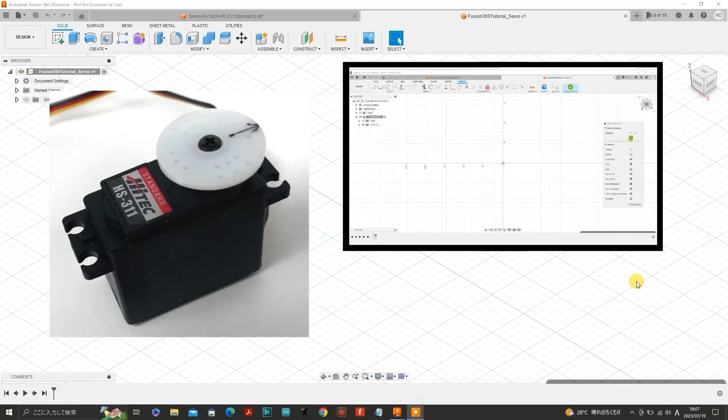In this video I'm going to show you how to draw a servo motor using Fusion 360. The servo I will be drawing is a Hi-Tech HS311 standard servo motor. This tutorial is part 1 of 3 parts, so once you finish part 1 you can click on the link at the end of this video to watch part 2 and then part 3. Alright, let's get started.

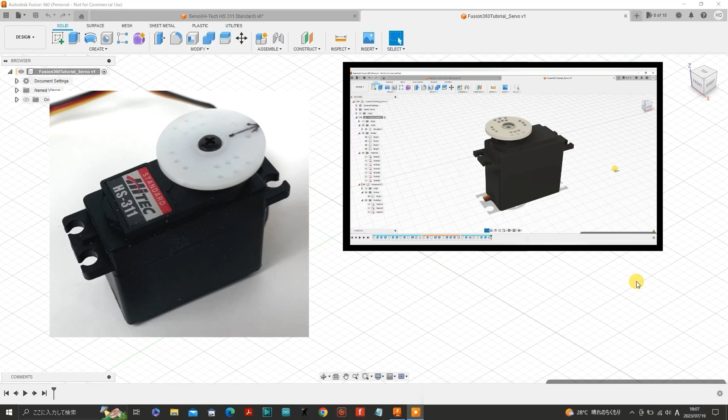Go to Create and click New Component on the pulldown menu. You should name the component if you're creating a large number of components, but I will only create 2, the servo body and the servo horn, so I'll just click OK and continue.

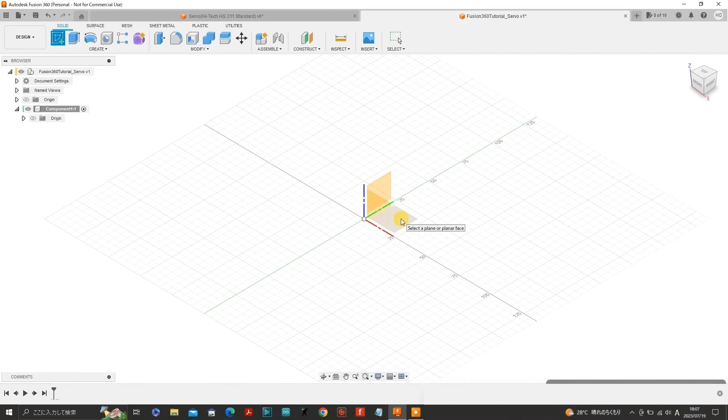Create a new sketch by pressing this icon. Select the XY plane, which is like selecting the floor or bed for a workpiece you are going to create. Now click on Rectangle in Create and select Center Point Rectangle in the sketch palette.

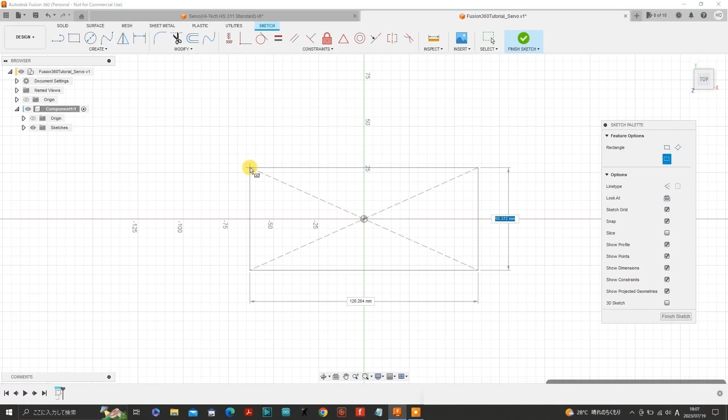Make a rectangle by first clicking the left mouse button on the center point or origin, releasing the left button while moving outwards to an arbitrary position, leaving your finger off the mouse button. Use the keyboard to set the width to 19mm, then press Tab to transfer to the next dimension and enter 52.8mm for the length.

I'll just use the scroll wheel on the mouse to zoom in. Click on Line in Create and create a left horizontal construction line from the center.

Make sure you select the construction icon from the line type in the sketch palette, although this can be changed later if you forget to do so, which I often do.

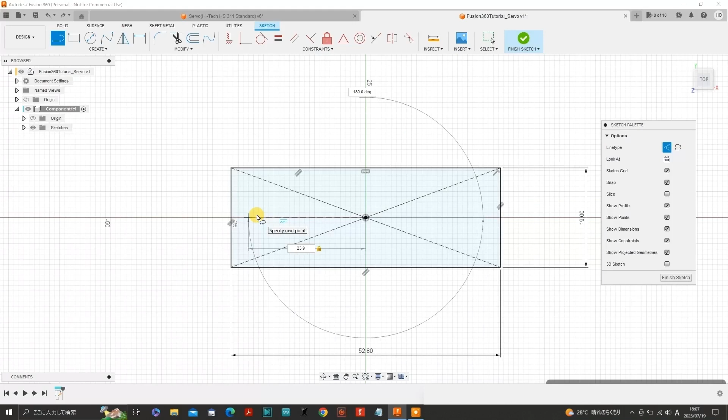From the center, left click once, drag the line in the leftward direction while leaving your finger off the mouse button. Without clicking the mouse, enter the measurement 23.9 from the keyboard and hit return. And there we have our first construction line.

If you are new to Fusion 360, the one thing you will need to understand and practice is being deliberate about dimensions and positions. You'll also need to understand the importance of constraints, which are essential for using Fusion 360 and also incredibly useful. At the moment, the center of the rectangle is constrained or locked onto the origin, position 0,0 on the XY plane. The constraint at the origin is automatic, so this constrained origin becomes an obvious reference point.

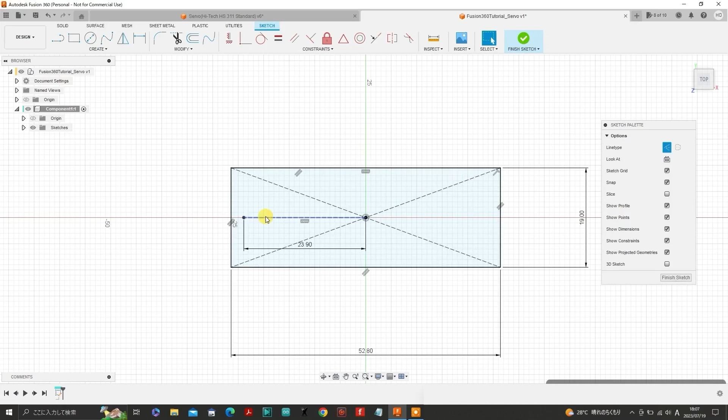Now what I have done is established a constrained construction line that extends leftward 23.9mm from the origin. Inputting 23.9 via the keyboard provided a deliberate dimension by which this construction line has locked onto or constrained. If I had just left clicked at the origin, dragged the line until the dimension read 23.9 and then left clicked at that position, it is unlikely that line would be locked onto that dimension.

Your sketch would not be constrained, in other words. If your sketch is not fully constrained, then you are going to have serious problems at the 3D stage.

Okay, carrying on, select the line icon and start from the left end of the horizontal construction line. Left click the mouse, extend upward with your finger off the mouse button and type 5.1. Now we're going to make our first hole in the left mounting tab of the servo body.

Select Circle from Create, bring the cursor back to the end of the vertical construction line we just added. Left click the mouse, extend away from the center of the circle, but don't click. Use the keyboard to type in 4.3, which sets the diameter to 4.3mm.

I'll just open up the sketches folder on the left here. As you can see, there's a padlock icon attached to Sketch 1, which means the sketch is currently fully constrained. The circle we just added has been drawn as a construction line by mistake.

All we need to do is select the circle and then press the construction line icon to change the circle to a solid line.

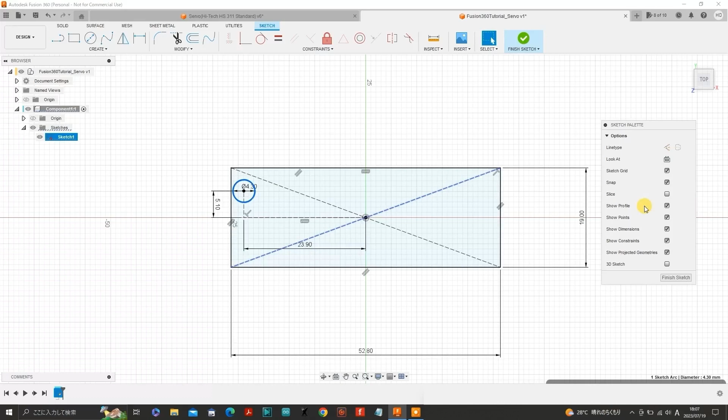Next we want a vertical construction line from the center of the rectangle. Reselect the construction line icon on the sketch palette again and then select Line from Create. Go to the center point, click on the center, drag a line until you reach the top line of the rectangle, and click the top line to snap the construction line in place.

As you can see, this sketch is still fully constrained. If you find that a pencil icon is still showing, that means the sketch is not fully constrained. You'd be best to click undo until the lock icon shows up again, and then find out where the problem is, where you went wrong.

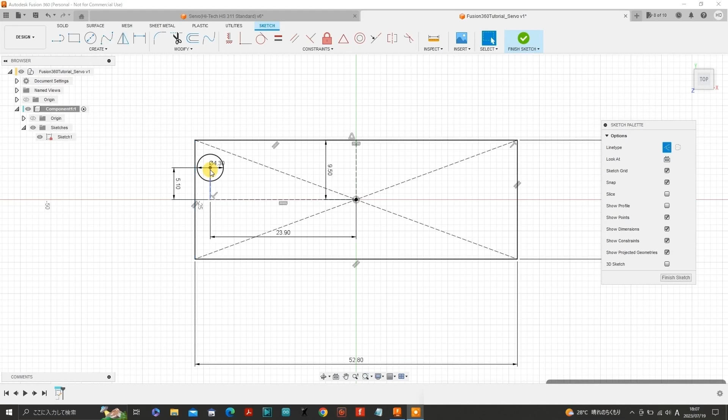Okay, I'll just zoom in a bit more. It's probably a good idea to put in a few more construction lines. Select Line from Create and draw a line here by left clicking the mouse, dragging the line until we reach the left side of the rectangle, at which we can left click the mouse, snapping the construction line into place.

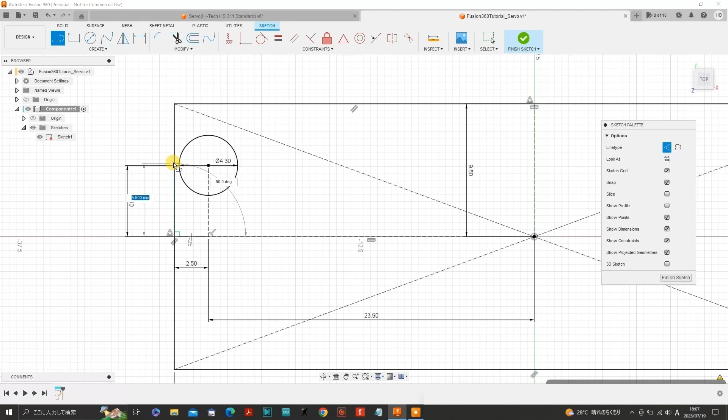From there we can left click the mouse again and extend a vertical construction line. Leave your finger off the mouse and enter 5.1 millimeters on the keyboard and hit return. From the end of this new construction line we can create another vertical line in the same manner, this time 1.3 millimeters in length.

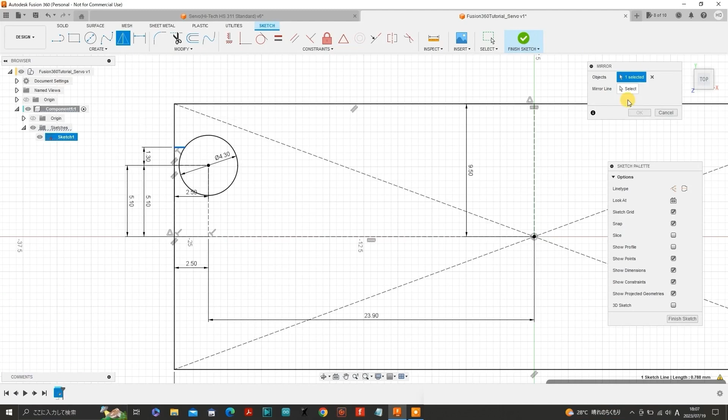Select mirror from create and select this little line that we have drawn. The mirror palette has popped up at the right side of the page here, where it indicates that one object has been selected. Next we need to select the mirror line, so you first need to activate select, that is next to mirror line indicated in the mirror palette, and then select the latest construction line that we have just drawn in.

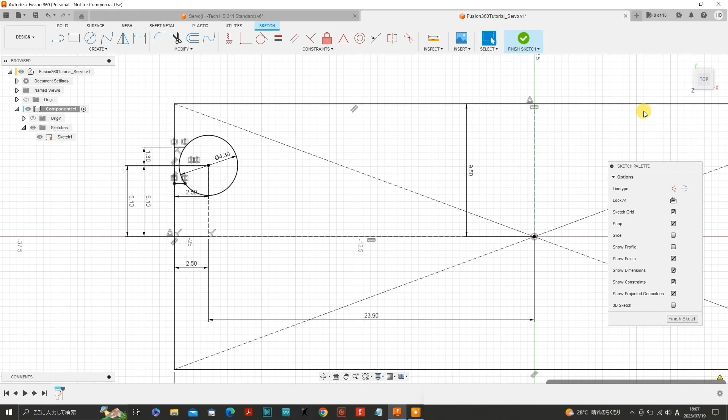Press OK on the mirror palette, and then we have a new little line on the opposite side of the construction line, fully constrained and with the correct dimensions. I'll just adjust and move over to the right side now.

I'm using the mouse wheel to do this. Now select the circle, just zoom in a bit, hold down the shift key and select the two little line segments as well. As a general rule, you need to hold down the shift key if you want to select multiple objects, that is the circle and the two lines here.

Then select mirror and create. Once again the mirror palette pops up, and as we can see, 5 objects have been selected this time. I think that is because there are 2 line segments, and then the circle has been divided up into 3 segments by Fusion 360 due to the presence of the construction lines.

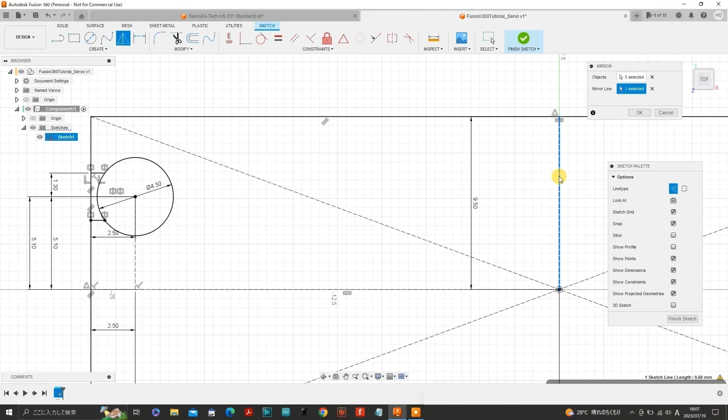I think that's why. Now we activate select next to mirror line in the mirror palette and select the vertical construction line that extends from the center of the rectangle. I'll just zoom out so that we can see the entire rectangle now. Press OK on the mirror palette, and now we have a duplicate hole on the right side.

I think now would be a good time to remove some unwanted lines. Select trim from modify and select the segments that you want to remove, like this.

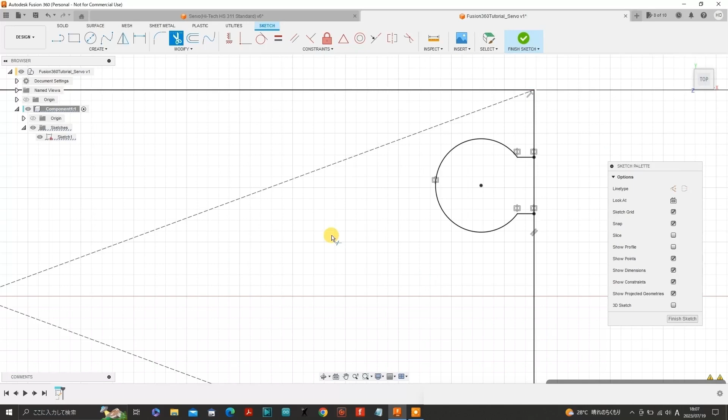As you can see, a warning will show at the bottom right telling us that some constraints and or dimensions have been removed during this operation, which is perfectly normal and nothing to be concerned about. I'll just do the same at the left side, which I probably should have done earlier. Anyway, better late than never.

Select mirror from create and select all the line segments of the 2 holes while holding down the shift key, because we've got multiple objects this time, so you need the shift key. Then after activating mirror line on the mirror palette, select this construction line and then press OK.

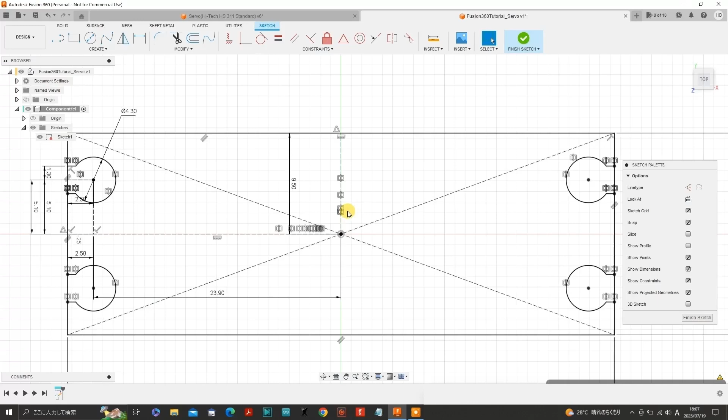Now we have all 4 holes which are located in the right positions in the mount tabs of the servo body. Now it's time to draw the main servo body.

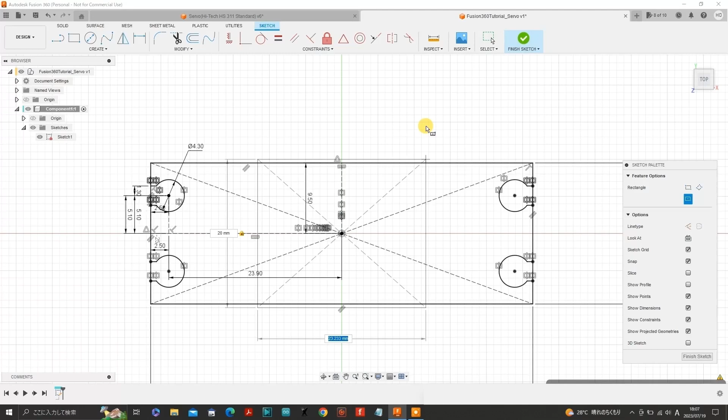Select rectangle from create and make sure you select center point rectangle in the sketch palette. Make a rectangle by first left clicking the mouse on the center point, releasing the mouse button while moving outwards to an arbitrary position. Use the keyboard to set the width to 20 millimeters and then press tab to transfer to the length dimension and enter 39.7 millimeters for the length.

I'll just move the dimensions here so that we can see it better. Okay, now we just need to make sure show profile is checked in the sketch palette, and then we can click on finish sketch. Now we can select the areas we want to extrude while holding down the shift key, which correspond to the mount tabs of the servo, and then select extrude from create.

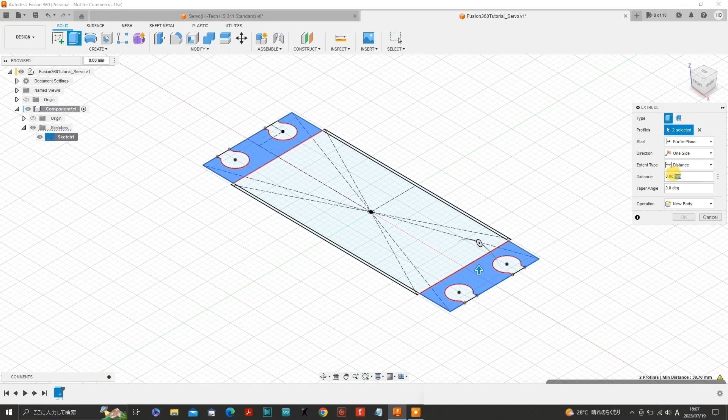As you can see, the extrude palette shows up on the right of the page, and I like to input the extrusion distance in the extrude palette itself. So we'll input 2.4 millimeters and click OK. And there we have two mount tabs.

Well, once you do the extrusion, the sketch disappears, but you can just reselect the sketch file on the left side here and it shows up again.

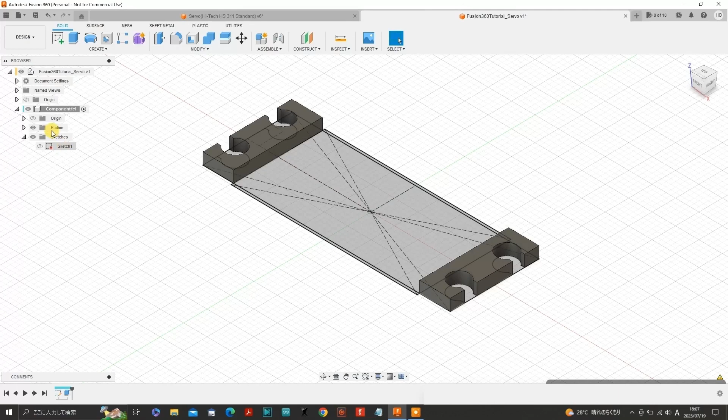We can also extrude the lower body of the servo. Select extrude from create. This caused the sketch to disappear again, so let's reselect the sketch file.

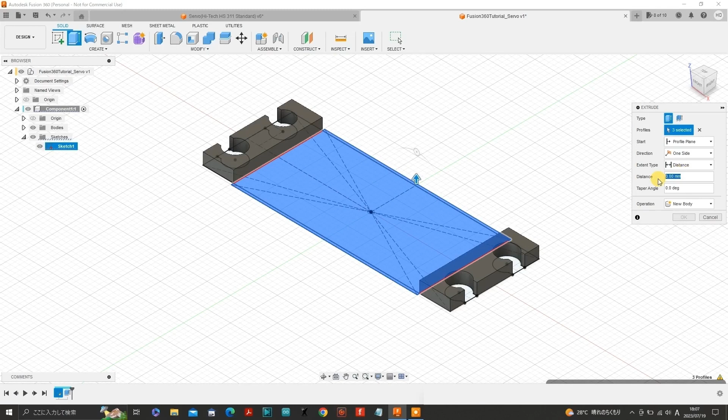Now select each segment of the middle area while holding down the shift key and enter negative 26.5 in the extrude palette on the right and press OK. It's a negative number because we're going downwards from the sketch plane, so the sketch plane is your reference.

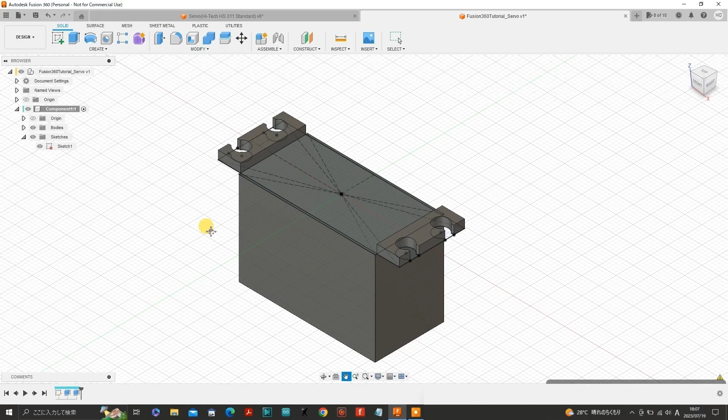Just resize it using the scroll wheel on the mouse, and now it's beginning to take shape. Let's move it to the center of the page. Select extrude from create so that the extrude palette appears.

Select three segments on the middle surface and input the value 33.3 minus 26.5 and press OK.

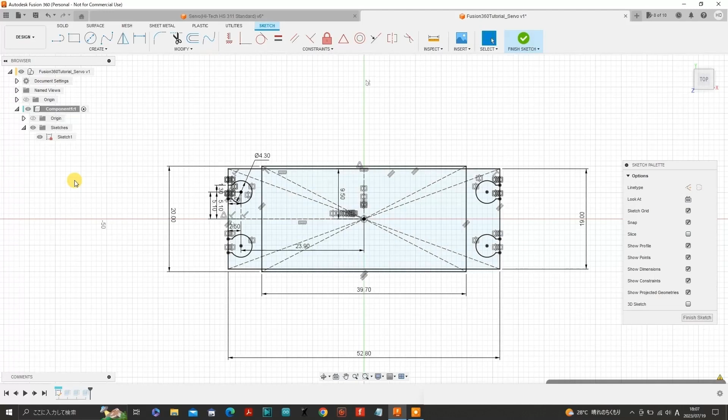Actually, we might want to edit the sketch around the corners of the main body, so we'll go to the sketch file and this time right click on it and select edit sketch. You don't need to, but I often like to switch off show profile on the sketch palette as well.

Adjust the size, select fillet from modify and select the short left side of the 20 millimeter wide rectangle and then the top side, and we get a 5 millimeter radius curve there. So we will edit that to 1.5 millimeters, so a 1.5 millimeter radius.

Now in this video I absent-mindedly hit return for each corner, but it's better to actually enter 1.5 millimeters just once and then select each side of the rectangle until all corners have been rounded and then hit return. That way if you need to adjust the radius of the corners, you only need to adjust one corner and all the other corners will automatically change.

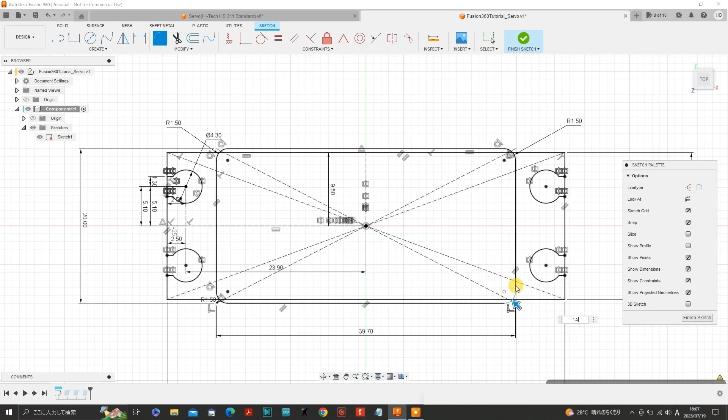Okay, so now we press finish sketch and select the little home icon by the block at the top right of the page, and there we can see a nice rounded surface along each vertical corner of the servo body.

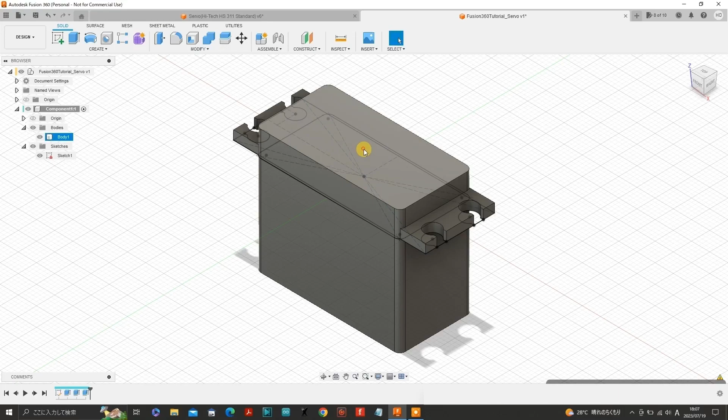Now we need to create a new sketch to lie on the current top surface because we will need to extrude from that surface, from that plane. So we click on the top surface and select new sketch from create, and we're back in sketch mode again.

As you can see on the left, we currently have two sketches, sketch 1 and sketch 3 for this component, and are both fully constrained. I did have sketch 2, but I made a few mistakes on it, so I ended up removing it.

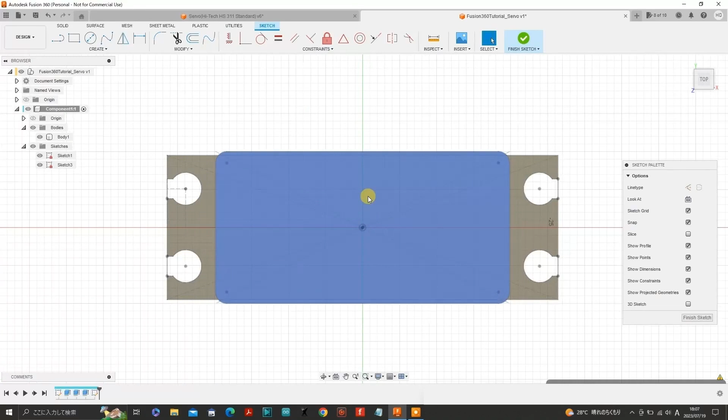It's best to hide the body here by deselecting the eye icon so that we can see our sketch. Next we will select rectangle from create. Choose the center point rectangle on the sketch palette. Go to the origin. Left click the mouse and extend the rectangle outwards, leaving your finger off the mouse of course.

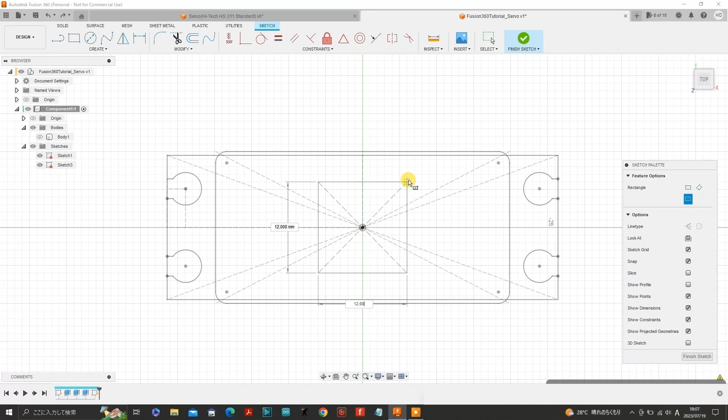Enter 38.7 for the length using the keyboard. Hit tab to transfer to the short side. Enter 19 and then hit return.

Now select Fillet from Modify, select the left top sides of the rectangle and enter 1 to create a 1mm radius, and do the same to the other 3 remaining corners.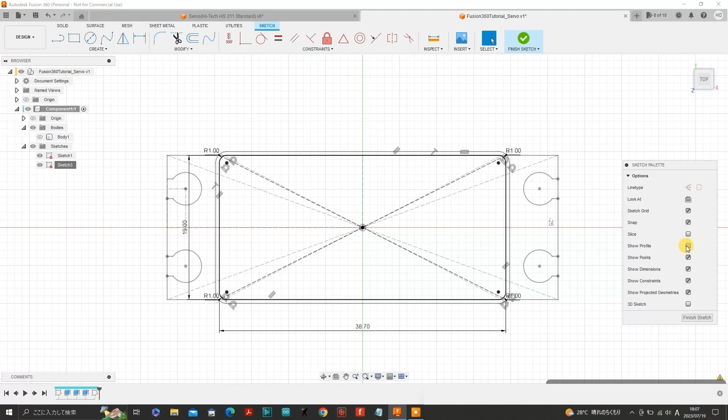Before we finish the sketch, we need to check Show Profile on the sketch palette and then press Finish Sketch. Go up to the little block at the top right and select the home icon that will show up.

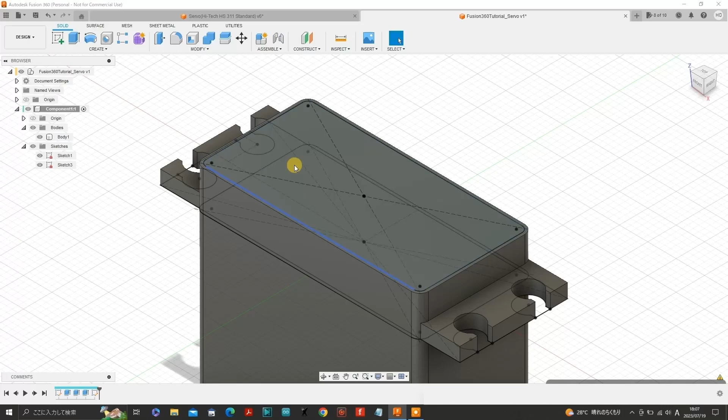OK, the extruded body is hidden here, so we'll just need to hit the eye icon by Bodies on the left side here. Select the top surface here, which activates your latest sketch, Sketch 3.

Select Extrude from Create, input a distance of 0.5 on the extrude palette, and then hit OK.

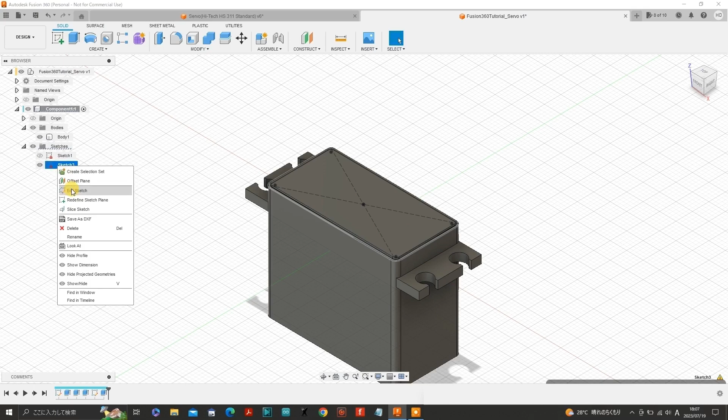Use the scroll wheel on the mouse to zoom out a bit and edit the sketch again by right-clicking on Sketch 3. We'll just hide the servo body for now by pressing the eye icon.

We'll want to show Sketch 1 as well, and uncheck Show Profile on the sketch palette. Just zoom in a bit.

We'll need to make a construction line by selecting Line in Create, turning the construction icon on in the sketch palette, and left click the mouse at the origin. Extend straight leftward with your finger off the mouse button, and we enter the value 9.9 and hit return.

Now select Circle from Create, go to the end of the construction line we have just made, left click the mouse and extend with your finger off the mouse button, enter the value 18.7 and then hit return.

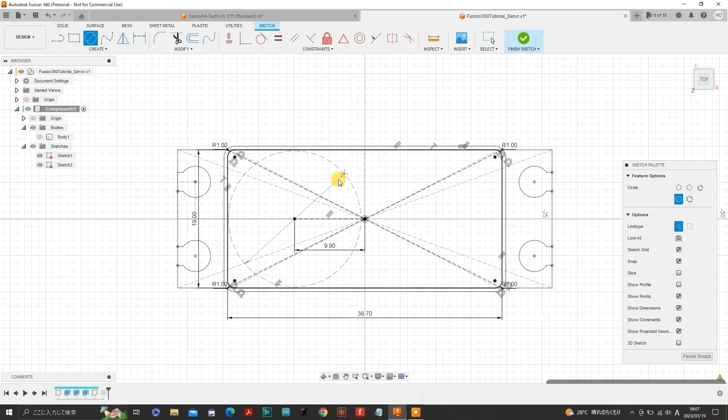I left it on construction, so just deselect construction on the sketch palette to change the circle to a solid line. Now select Line from Create, turn on construction on the sketch palette and start from the right side of the inner rectangle.

By the way, this inner rectangle is on the current Sketch 3, whereas the outer rectangle is on Sketch 1. Select a point on that side by left clicking the mouse. From there, extend a construction line, now with your finger off the mouse button, enter 4.5 and hit return.